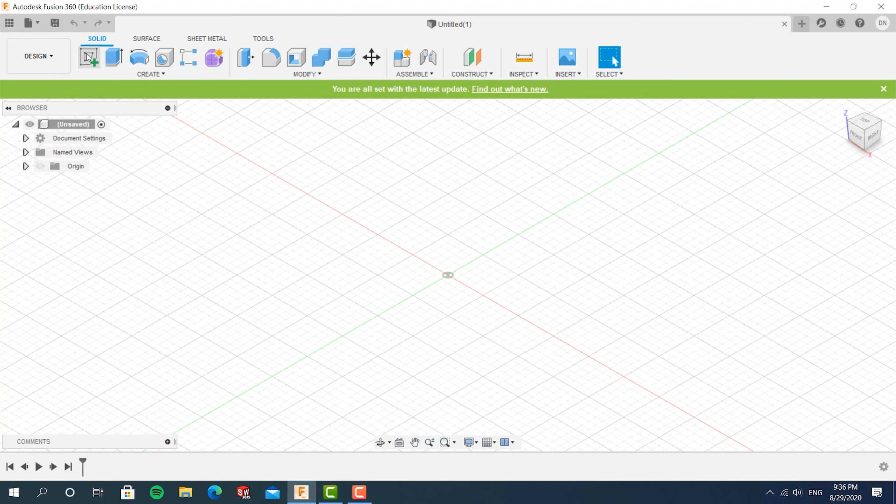Okay, so now let's get going with the tutorial part. For anything you want to CAD out, you want to first create a sketch. A sketch should be a 2D version of whatever you want to do. So let's start by creating a sketch using this tool right here, create sketch. For that, you need to choose a plane to draw your shape on. Right now, let's choose this plane right here, which is the front plane.

When you're sketching, you have three basic types of functions. First is create. Basically, you create different shapes, different things - this is the bread and butter of whatever sketching you need to do.

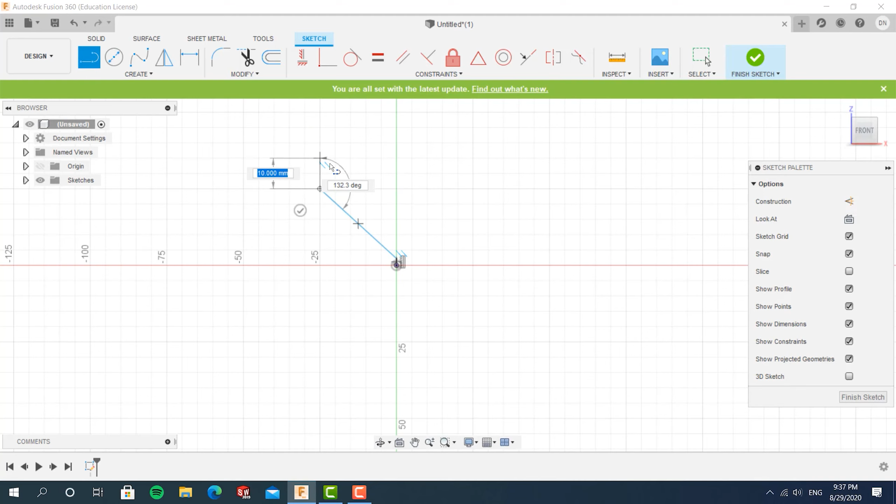You can add lines, the most basic shape. This is like its name, just a line between 2 points. The first click decides where the line starts, the second click where it ends, and when you continue on, it continues from the end point of the previous line - your next click becomes the end point of the next line. If you want to exit this function, you can double click, click a point you already have on your sketch, or press escape.

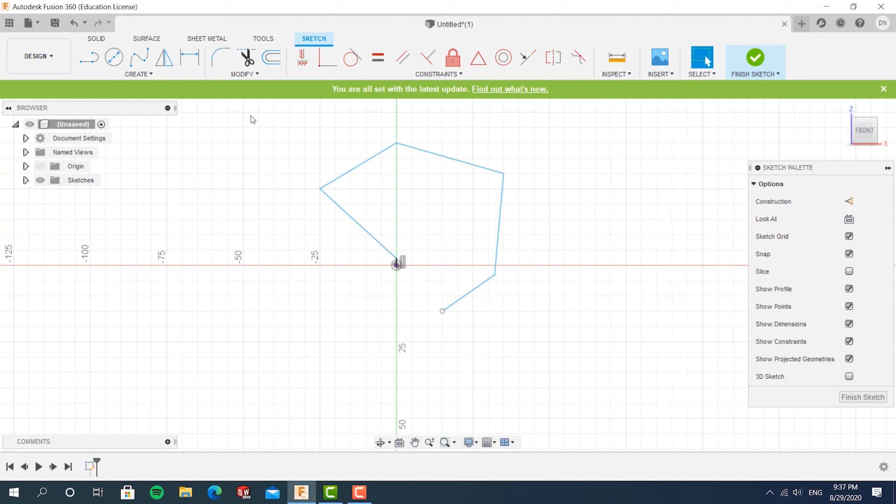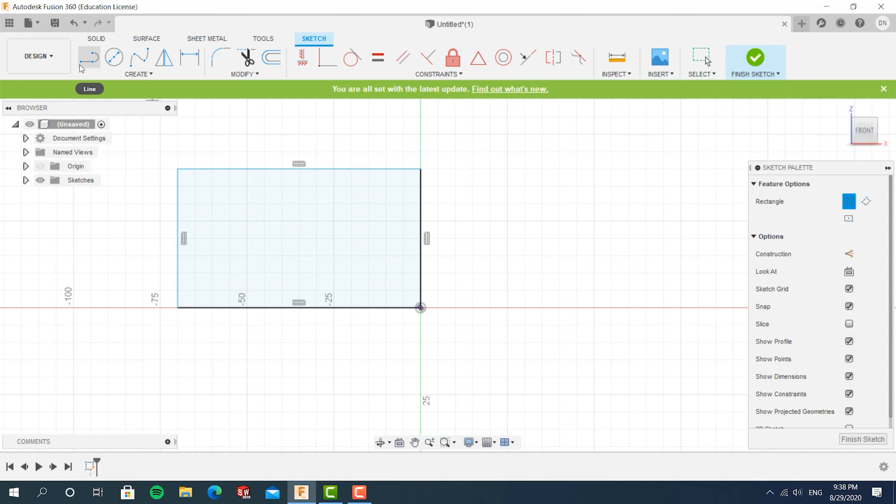Okay, so let's delete those. Other functions you have are creating rectangles - these are the different types you can use. The most simple one is the 2-point rectangle, where you create a rectangle out of 2 corners. The limitation of this one is it will mostly line up with the 2 axes. You cannot make a rectangle going this way - it's not a thing you can do with the 2-point rectangle.

If you want to do that, you would need to use a 3-point rectangle, where you choose 3 different corners. Let's delete those and move on to the next one.

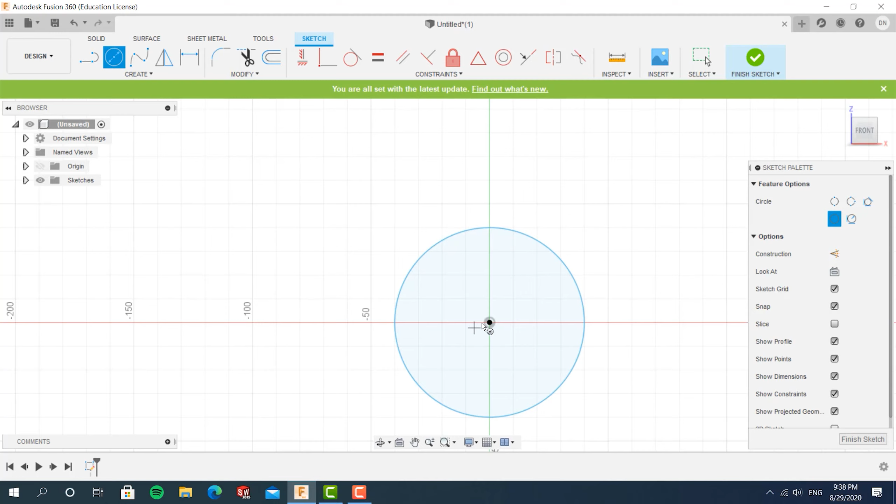The next tool is going to be a circle. The first click is the center, the next click is one of the border points - basically you just draw the radius and it creates your circle. You have other ways to draw a circle, but that's the most simple way, and most likely you'll just use that one and add constraints later to limit it or set it where you want.

You can create an arc, create a polygon, ellipse - everything is very simple and bare bones. You read the name and you basically get it. The things you most likely won't get right away are the spline and the dimension, so let's talk about those. But first, let's just delete this so we have a clear sketch.

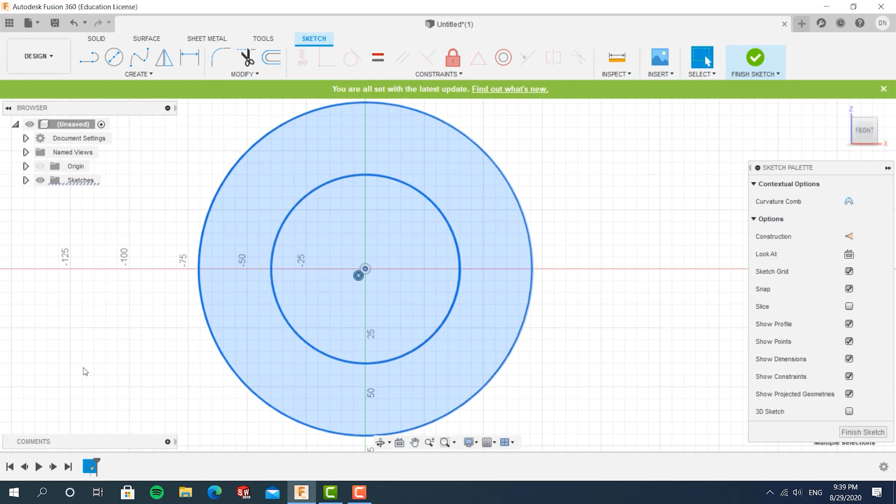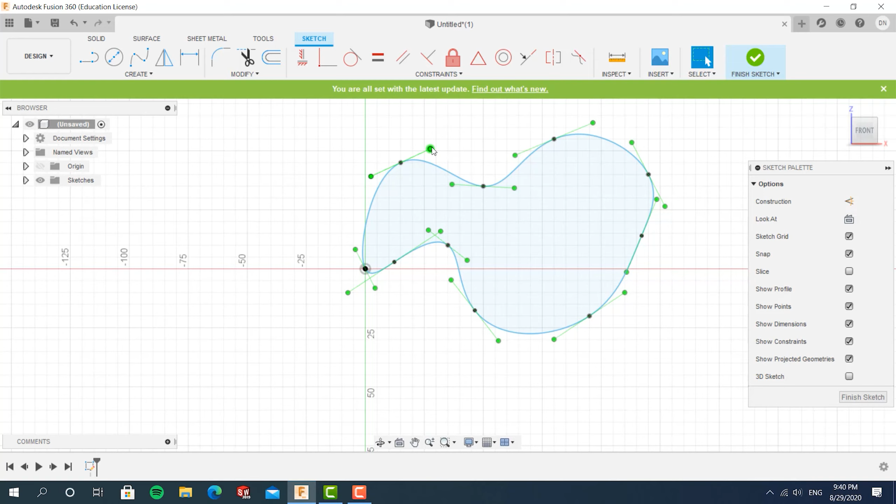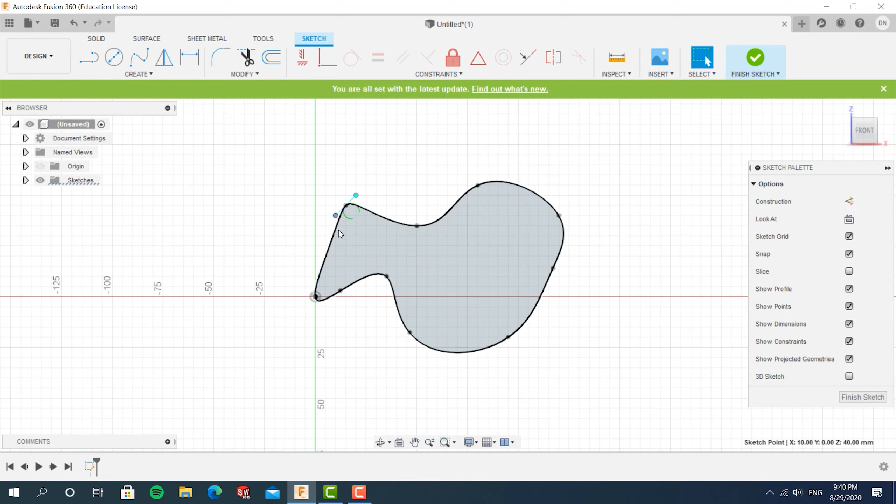A spline is basically a smooth curve that goes through all of the points that you choose. Right here, it goes through all of those black points, and when you want to modify it, you can modify these green lines and green points here called the spline handles. If it's longer, it will follow the spline handle more closely, and if it's shorter, it won't follow as much - you can modify those. This tool is very useful for making weird shapes, when you only have some constraints of the whole shape but don't really know what the shape is like.

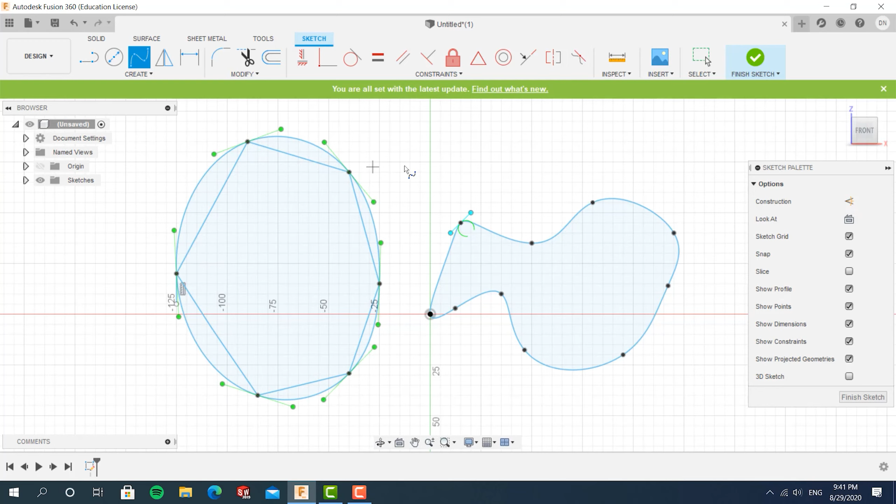For example, if I want a smooth curve that goes through some points, I'll draw out a random shape. Let's say this is a rock and I want a smooth curve that just covers the whole rock. I can just choose all of these points - I'll need to change the spline handles later on, but basically you can get a smooth curve that covers the whole thing.

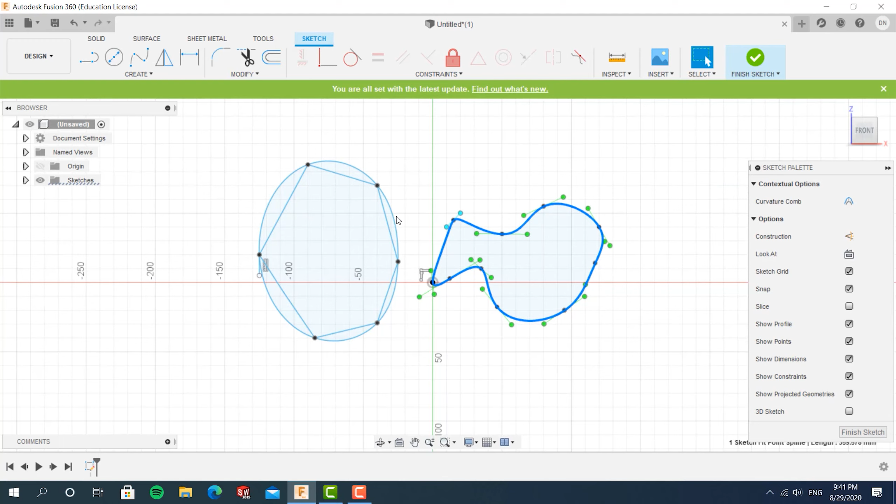It's very useful when you just have some constraints but you don't know the whole shape. Okay, so that's it for the spline. Really, for now, you don't really need to know much about the spline. It is not something that you would need to care about when you're just starting out. Let's just delete off those and get to the next thing.

The next function that you might be confused about is the dimension. Dimension is basically adding size and constraints that are related to numbers about everything that you have here. Let's add some shapes, and now let's test the dimension function.

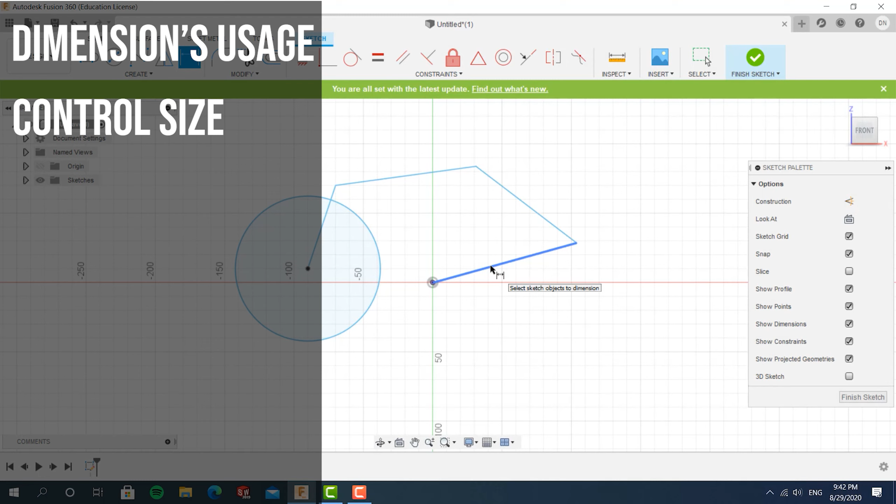The first thing that you can change by using the dimension function is the size of everything. You choose a line, you can choose the length, and you can change the length of the line. Let's say right now it's 107 millimeters. I can change it to 50. You can see that it's shortened by more than half.

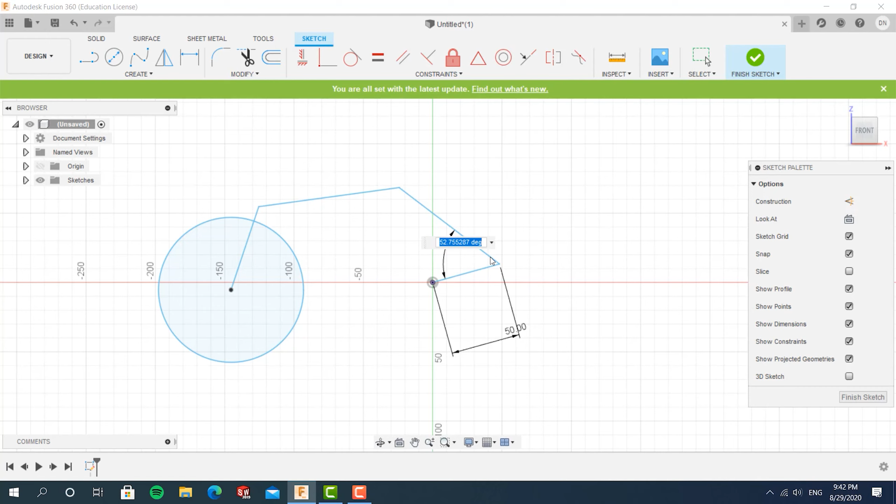You can change the angle between two lines by pressing both of them. Right now it's 52.

I can just type in 80 and it will turn into 80. You can change the length of it in a certain axis, so this is the length of it in the x-axis. I can change that to 40, for example. I can change the diameter of a circle.

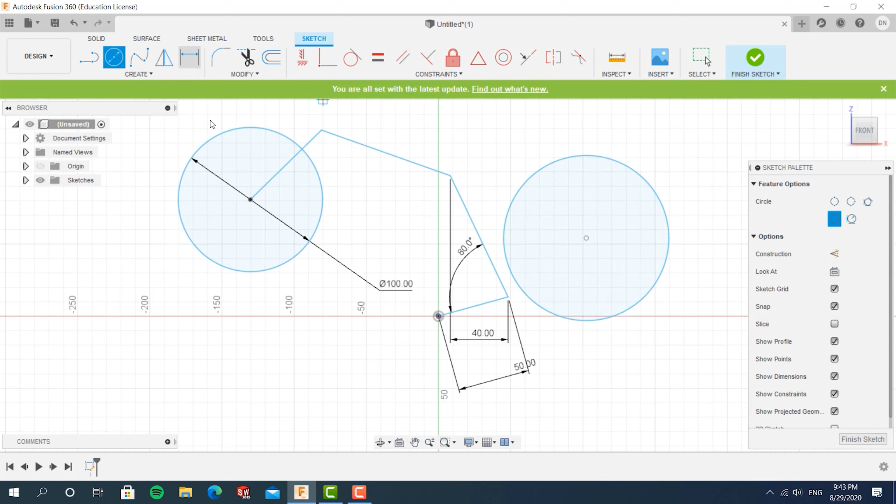Furthermore, I can change the distance between the center of circles and just generally between points. Let's put this as 200, for example.

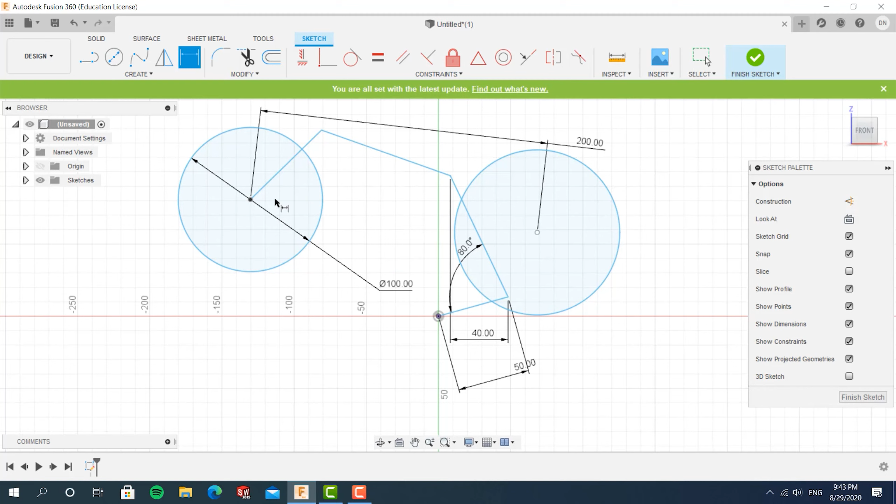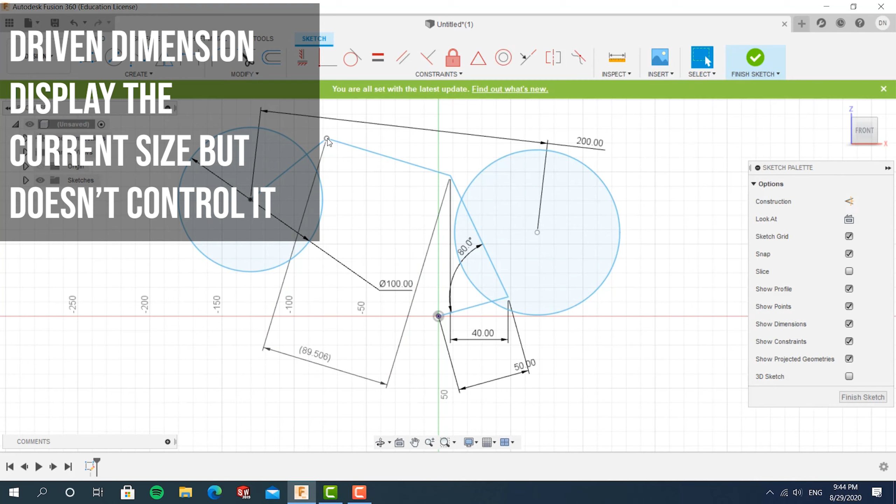Another thing I would like to note about using dimension is that there's a thing called driven dimension. For example, if I choose this thing here, instead of clicking it immediately, I change this to driven. Now this will not change the actual length of this line, but the number will change accordingly when you change the length of this line. Basically, if you have a part that you don't know the size of, you can just add a driven dimension there and change every other thing, and then whatever you're left with is the number you need.

Okay, then you can move on to the modify functions and the constraint functions. Constraint is basically adding relations to different objects that you have on your sketch. You can make two lines parallel, make their length equal, make them perpendicular to each other.

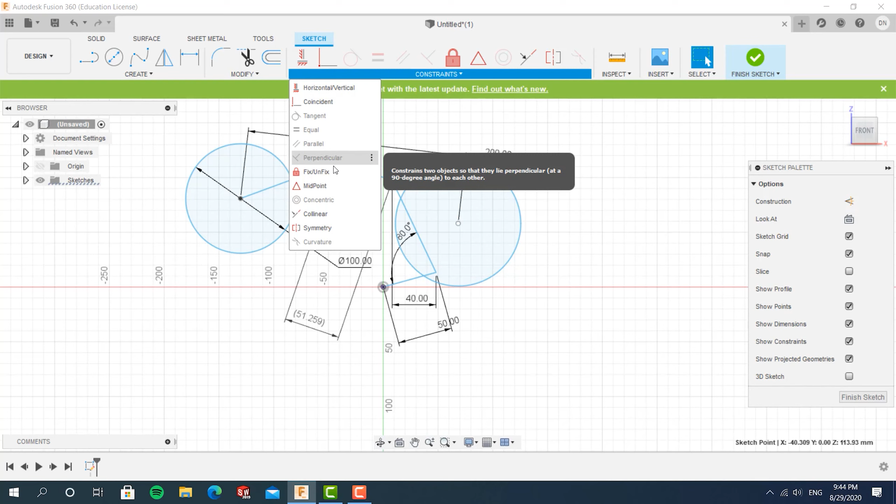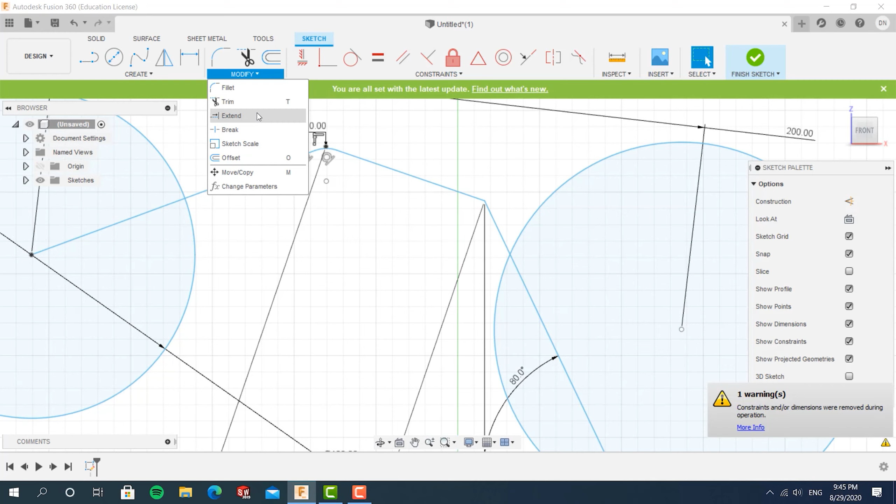Basically, these things are very easy to understand. It's just relations between different lines, different circles, lines and circles of the objects. It's very simple. Fillet is creating a round corner between your lines, and trimming, like its name, you just cut things out.

Offset is, well, you make an offset of whatever you want. Like this here, it's basically copying this whole shape, pushing it in a direction perpendicular to whatever point it's copying. The offset function basically offsets whatever you want.

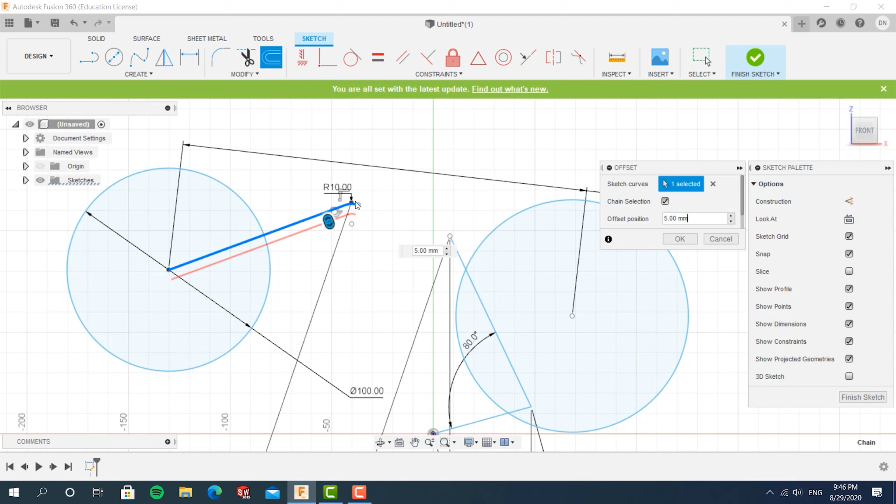As its name suggests, it pushes every single point in the thing you're trying to offset in a direction that is perpendicular to the slope at that particular point. So everything in this line over here will be pushed in a direction that's perpendicular to the line. This curve right here is going to be pushed inward toward the center. That's why this curve is very small compared to this one. That's basically the gist of offsetting.

Okay, because I know that this will not help much by just talking about the tools, we will now try and make an actual thing. In making an actual thing, I will show you functions that are there from a sketching function. Let's start that now.

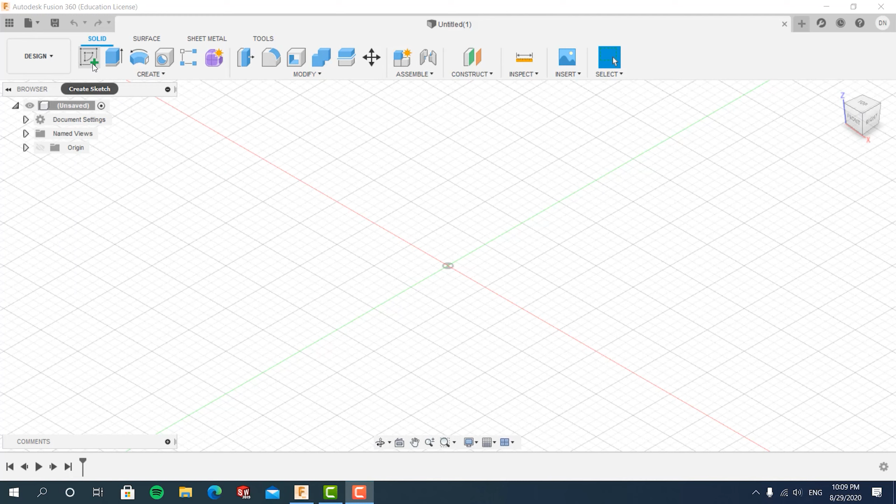Okay, so we're here in a new file to create an actual object for this tutorial. When I learned how to CAD, I was taught how to make a die. When I teach anyone to CAD, I teach them how to make a die. So that's going to be the same thing—we're going to make a die. First, like every single CAD file, you would need to start with a sketch. A sketch of a die is of course going to be a square, because the die is going to be a cube.

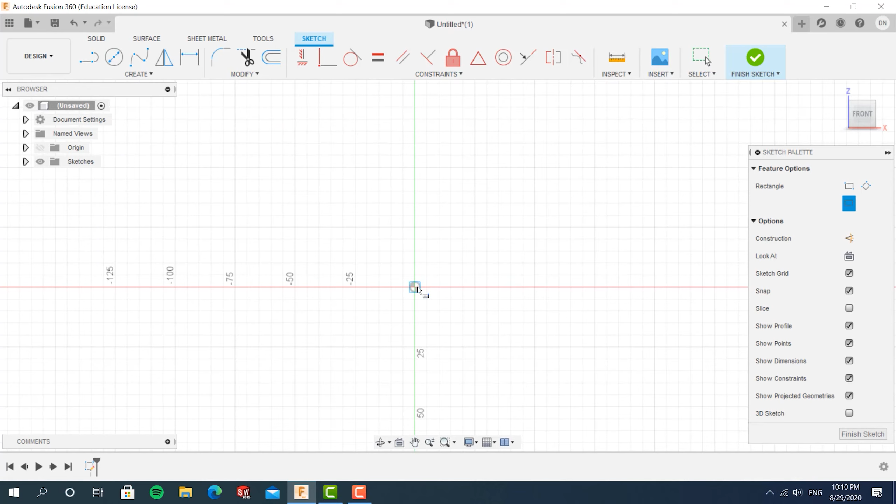So you center a rectangle, starting from the center of the whole file and stretching out. The first thing you want to do is make these two equal because you want a square, not a dumb rectangle. Then add in the dimension for the side of the die. So 50 is good enough.

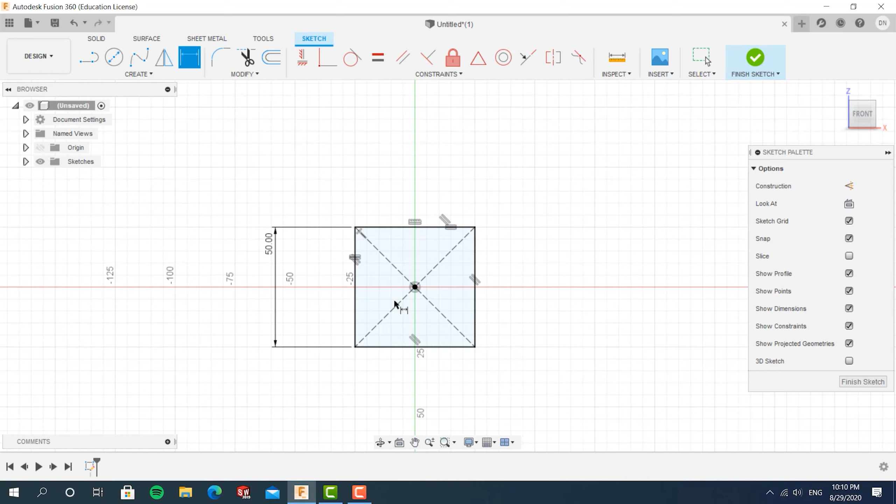After you have a 2D sketch, you have to use one of these two functions to make it into a solid. Because it's going to be a cube, you want to push it up, using the extrude function, which creates a solid object by pushing your sketch along a particular axis.

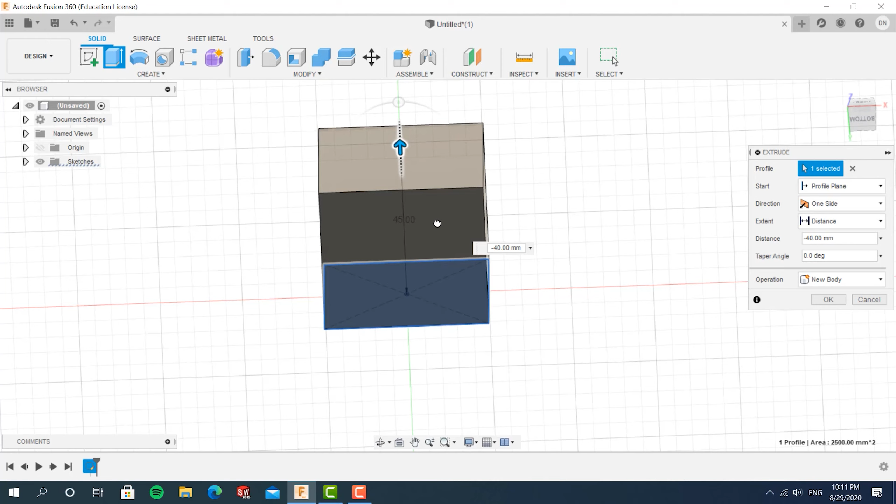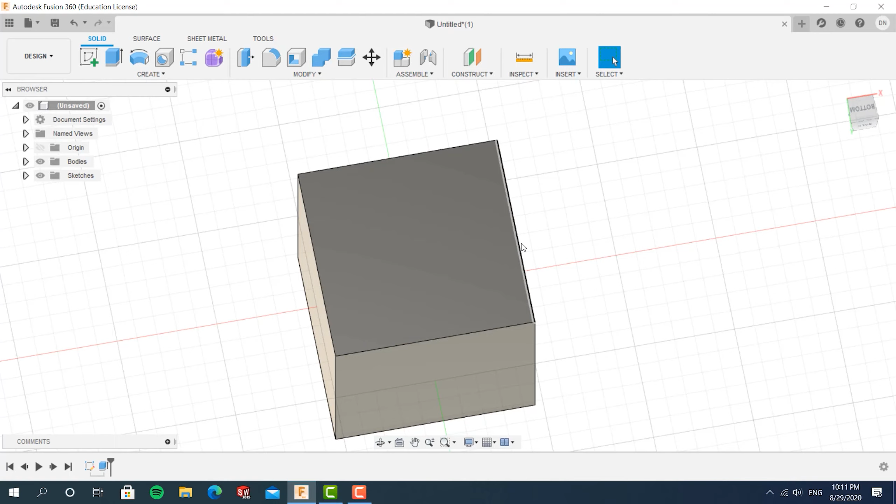Because we want the center to still be in the middle of the whole sketch, we don't want to push it only on one side. We want to push it on both sides symmetrically, so both sides should be 25, making the total length 50. Now you have this cube here.

The thing about a cube is that if you look at the whole thing, it looks a bit silly. You never see a die that's a perfect cube because that just looks silly. So one of the things you can do is use this function, which smooths all of the edges.

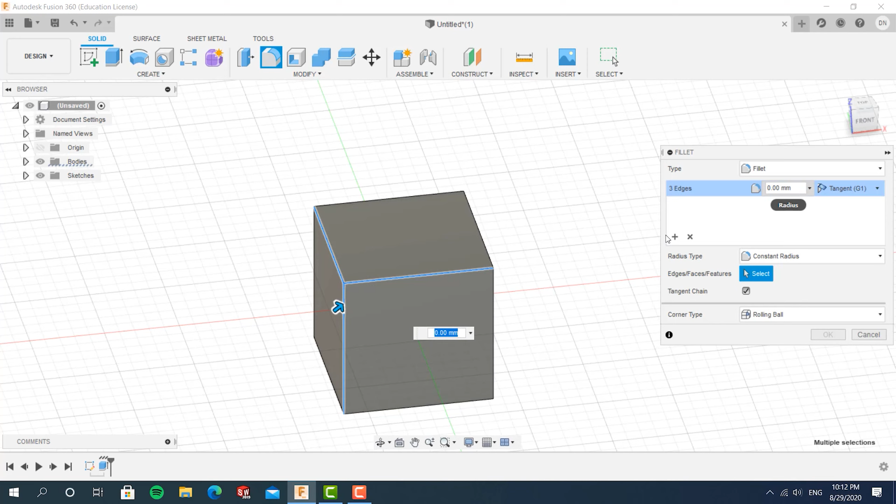Let's smooth down these three edges as an example. If I add a 5, it's going to smooth it down so that the radius of this cut is going to be 5.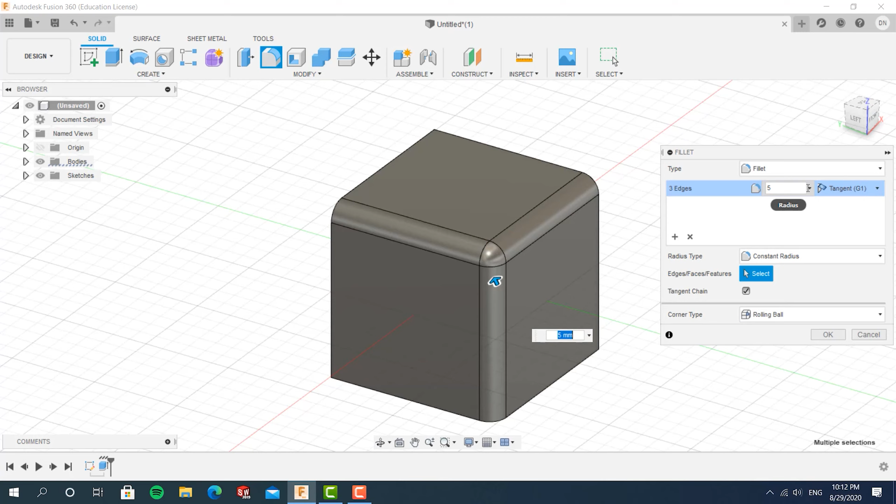We want to smooth out all of the edges, so remove the current selection and select the whole thing instead. 5 seems good. This immediately looks better, but we can still do a bit more, so let's delete the fillet function for now.

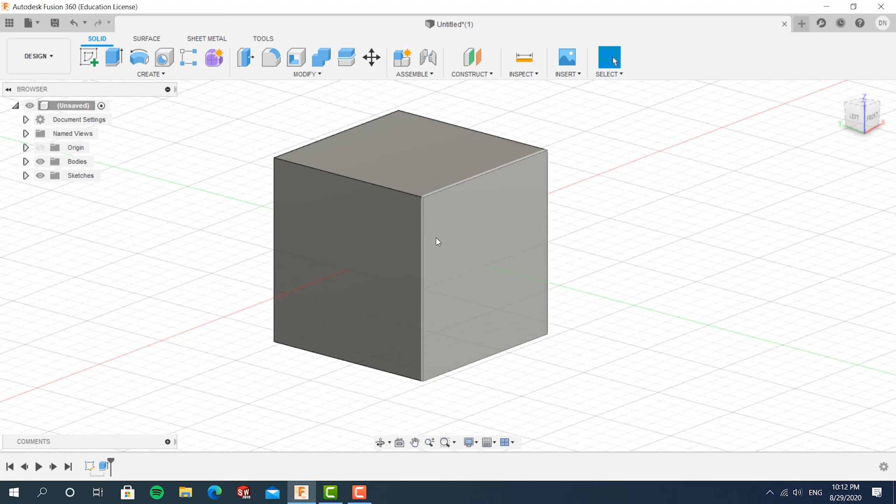This way of making a die look better is kind of a trade secret for me. First you need to draw something right in the middle, so let's choose a plane that's in the middle to draw a circle, and then take out a big area around that.

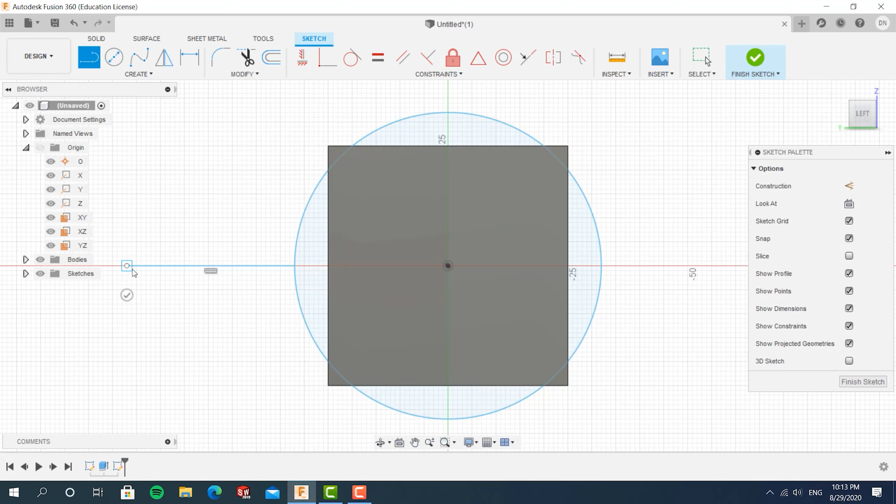The thing you want here is for the corner to be very small. Let's set this to 64. The corner still seems a bit too big, so let's add some more to it. Let's say 67 — yeah, that looks good.

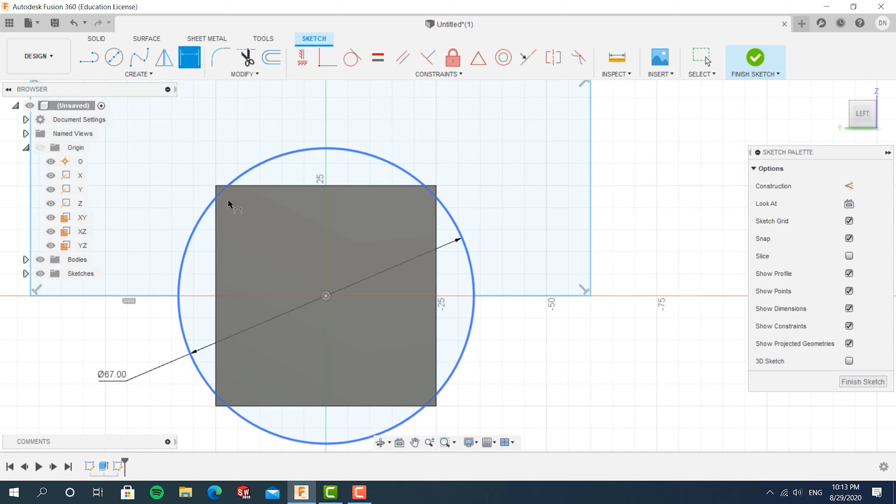You don't want to just extrude cut the whole thing out, because if you extrude cut a cylinder out here, you're left with four awkward corners. Instead, you want to use a revolve cut.

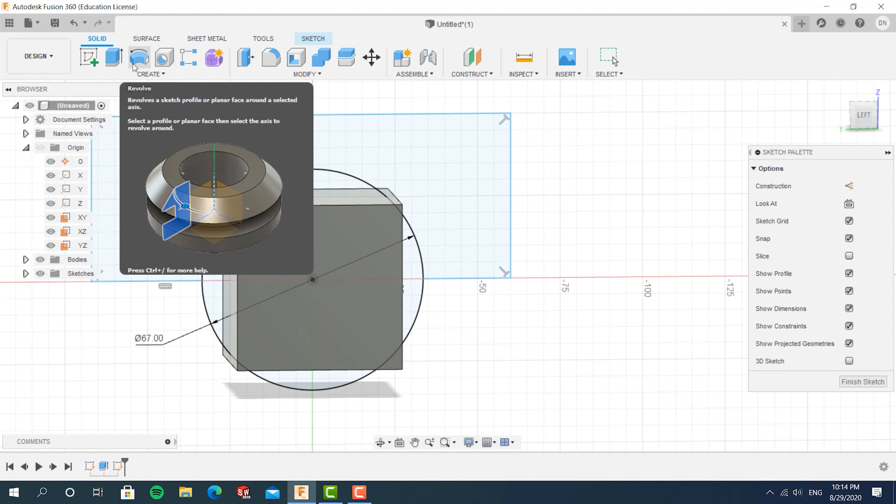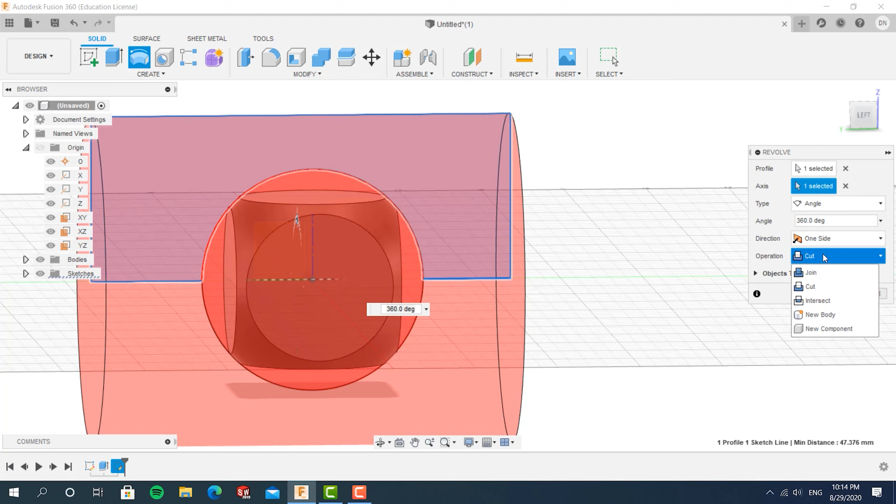This function basically spins an area around an axis, after you choose whether to add a new body or cut something out. Right now we want to choose this big area, use one of the axes, and change it to cut instead of new body.

We cut that out, and this looks pretty nice. It's kind of a mix between a cube and a sphere. It's kind of weird, but it looks good, so I guess that's why I like it.

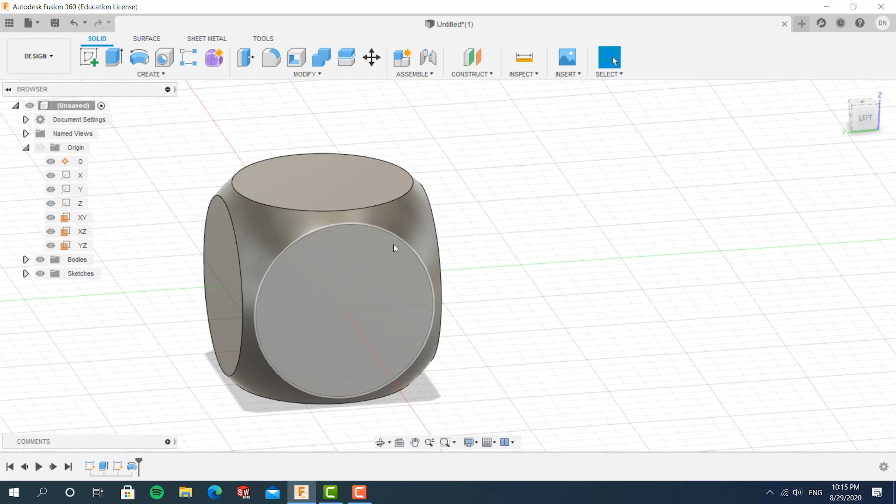For the die, you want to draw out the holes. For those of you who can't remember the orientation of the holes on a die, just remember that two opposite sides add up to 7. If this side is 6, the opposite is 1; if this is 2, the opposite is 5; if this is 3, the opposite is 4. So let's start.

We can make the hole in a myriad of ways. The first way is to draw a circle and do something similar to what we did to create the nice shape for the die — just revolve cut it around.

If you make the center of the circle straight in the middle, that would look really weird, as the hole would be way too small but way too deep. So you want to offset it up a bit.

Generally, what I've found to look pretty nice is if the distance between the center of the circle and the face is 1/3 of the diameter of the circle. So if I put this as 9, the distance from here to here should be 3.

This small area here is going to be the cross section of the thing you're going to cut out. So again, use the revolve cut function, choose this area, and choose this axis to cut out the whole thing.

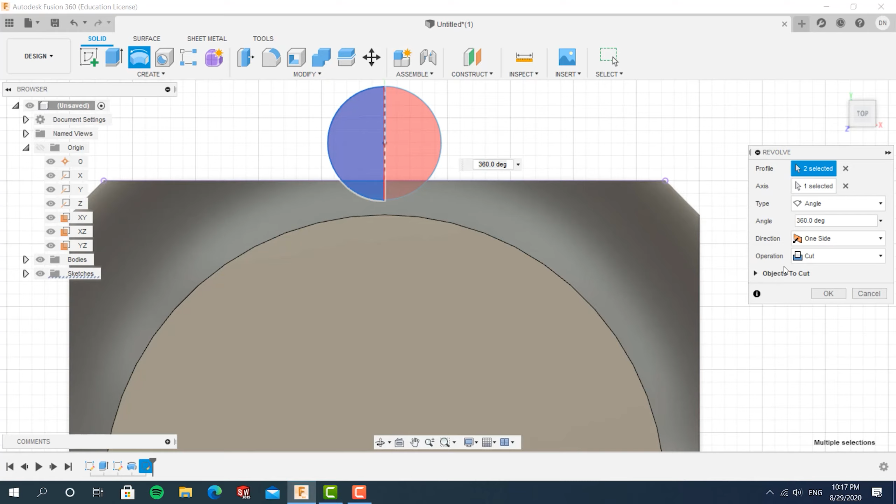Also, you cannot choose areas on both sides of the axis, because that will cause errors in the system — only choose areas on one side. Cut that out and we have this nice hole up here. Let's continue with the other ones.

So the next one I want to draw is going to be the 3 hole, because that's another simple one, because it has a hole right in the middle. So again, draw a circle, draw some lines to separate it into 2 halves, so that also serves as the axis for your revolve cut.

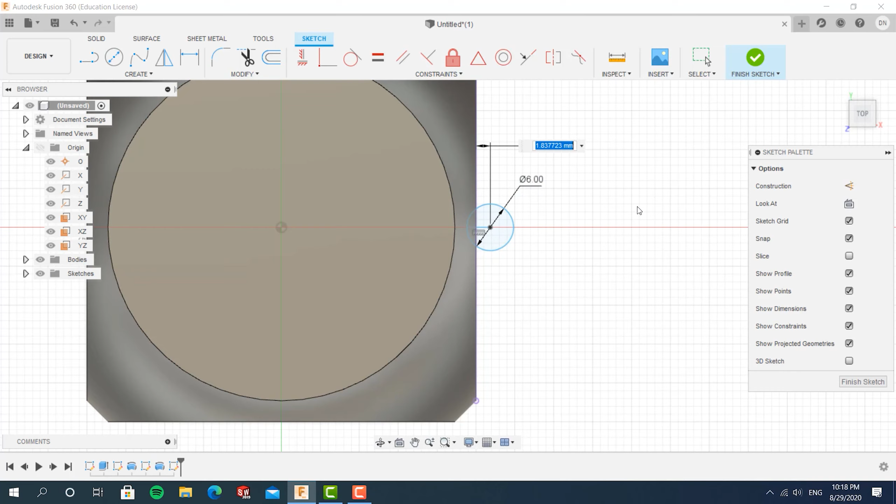If you, because this one is going to be the 3 and not the 1, it should be a bit smaller. The previous one was 9, so let's put this as 6. This is 1/3 of it, so it's going to be 2. And then we can cut it out. Revolve cut, choose this one, choose the axis, cut.

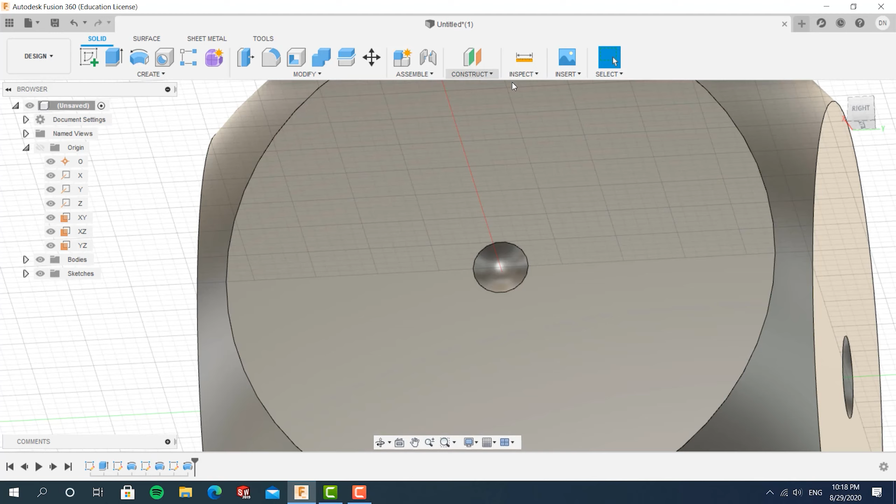Okay, we have a smaller hole over here. Now, because we don't want to draw 2 circles over here, we need to make an extra plane. We need to do a lot of stuff, and that would take a lot of time. We don't want to do that because everyone is lazy and everyone should do things as efficiently as possible.

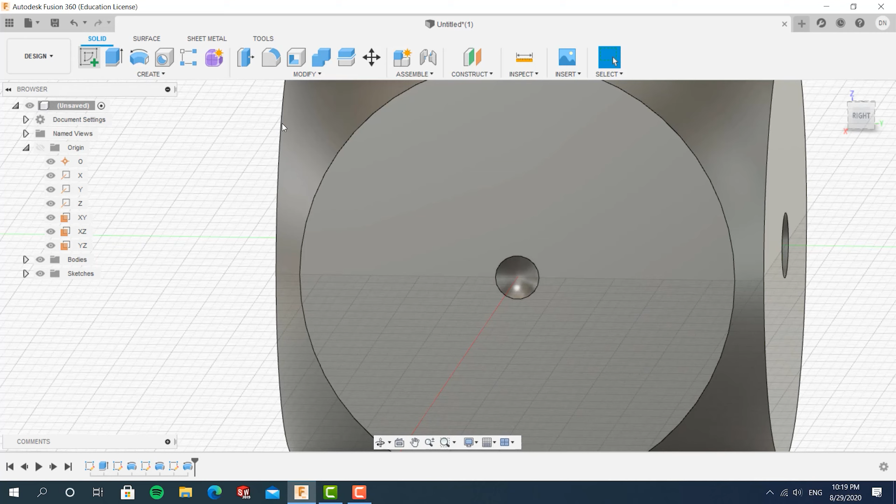We're just not going to draw new circles and cut new holes. We're going to use a pattern. Basically to use a pattern, you copy whatever body or feature is the thing we're about to do. We're going to copy the revolve cut feature right here and copy it in a particular direction. For the 3, we're going to copy it diagonally, so we need a reference for it to go diagonally. Let's draw that reference right now.

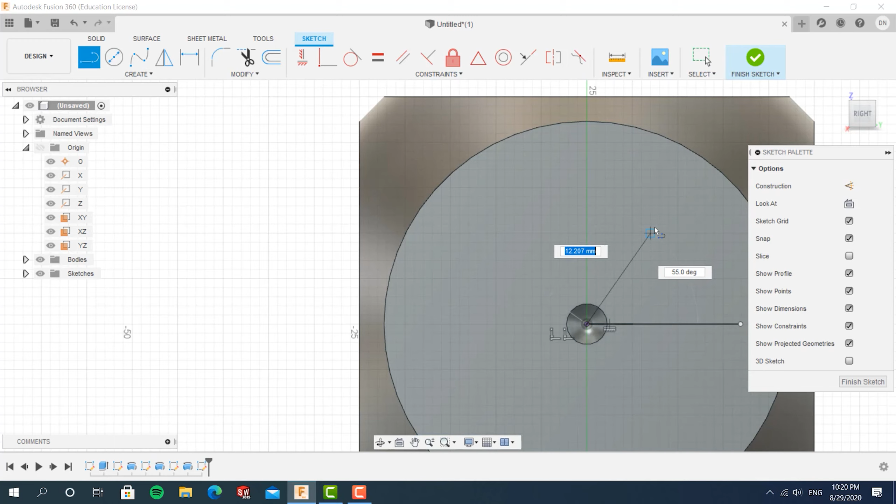So first, draw a line, and then actually we need to draw 2 lines. This is trying to act stupid, so let's make this construction. Let's just add another line, that's more simple. Okay, dimension, make the angle between these two be 55.

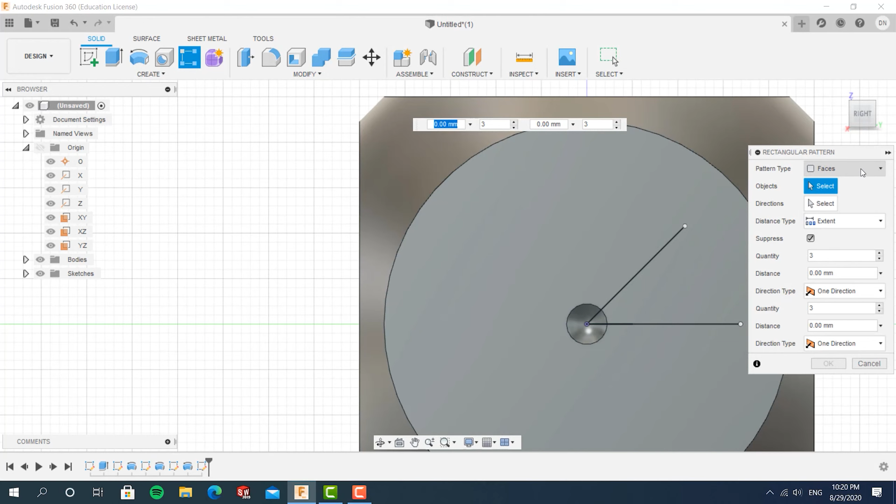So that's going to be our reference. Now finish this sketch and move on to this thing. So the pattern type is not going to be faces because the thing that we're copying is a revolved cut, which is a feature. So copy this feature. The direction that we're going to copy it along is this axis.

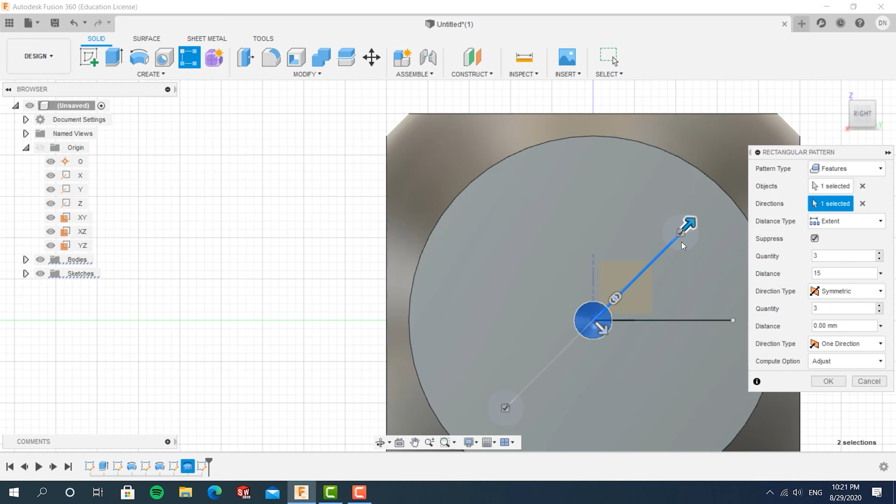Now, it's a 3, so we need to cut it on both sides. So symmetrical. Let's check. Now let's just change the numbers and see what looks nice. Okay, 15. You can see the 2 holes over here. That's good enough. If you want it to look better, you can hide your sketch.

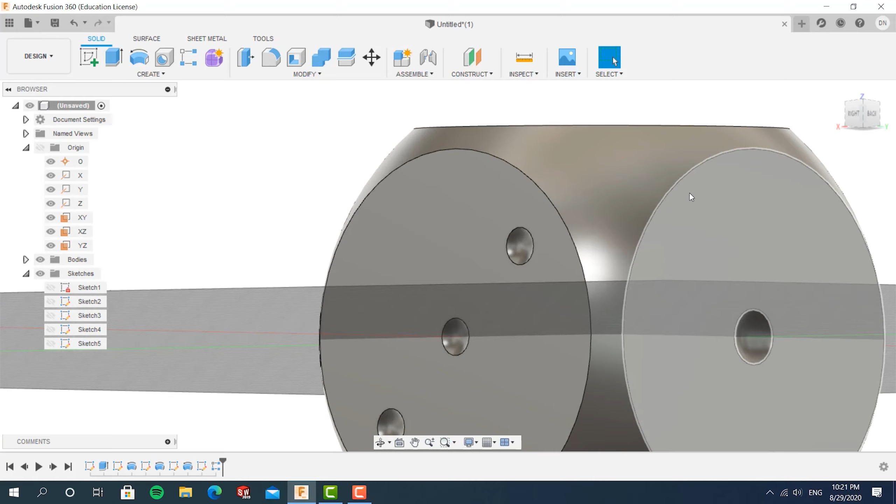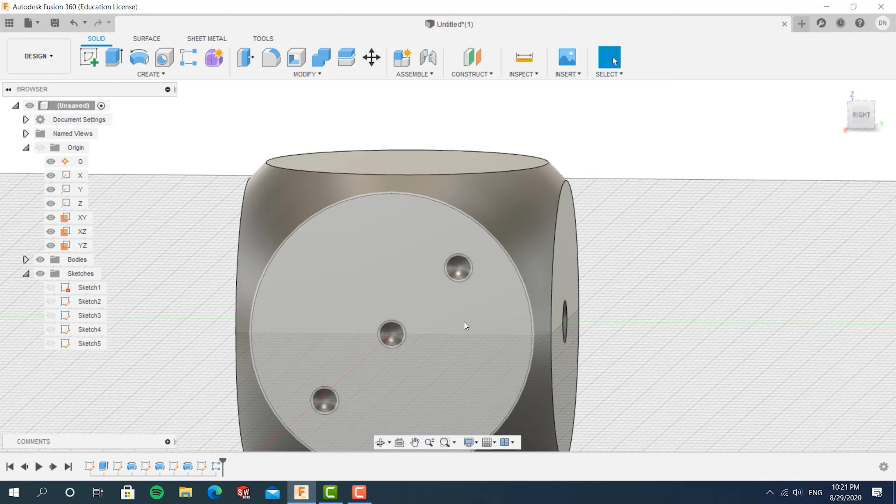Where is it? Yeah, here it is. You can hide it. So now we can move on to the 2 hole. Basically the 2 hole is just the 2 holes on the side of the 3. So we can just copy this and move it to another face. We're not going to use a rectangular pattern because that one doesn't change, that one just pushes it up somewhere, and we cannot push it that way to this way because we also need to spin it so that it's on this face instead of this one.

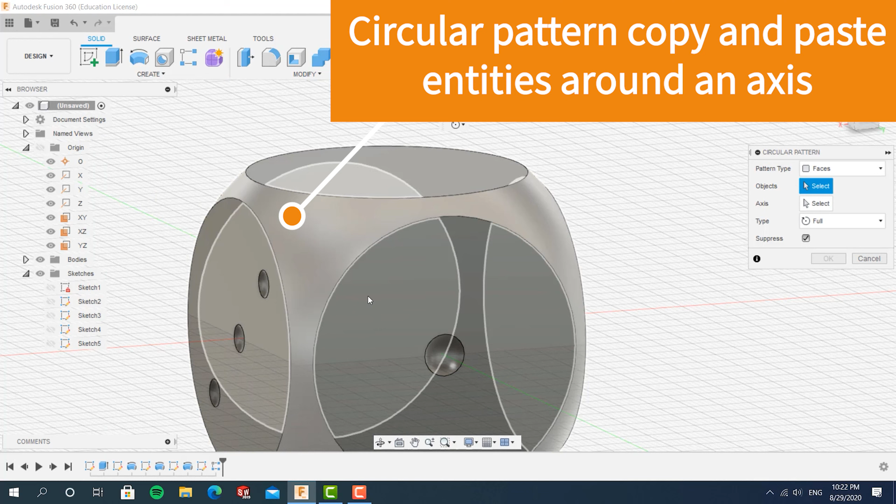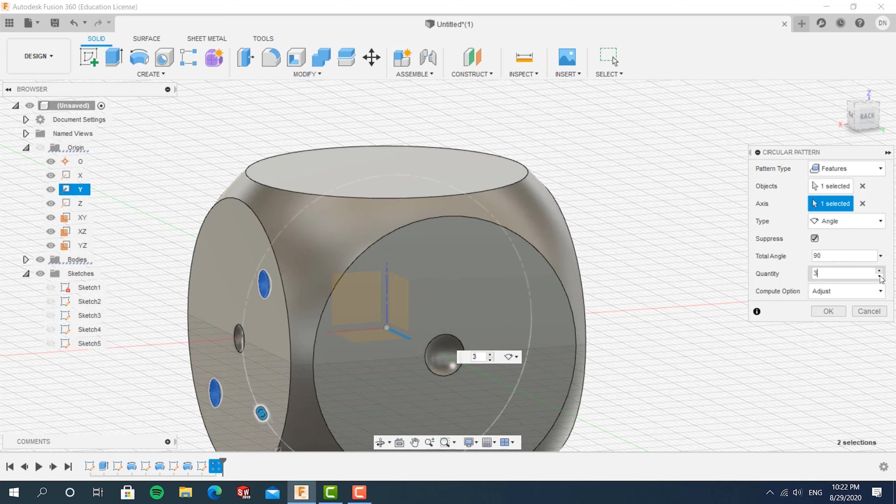So what we're going to use is the circular pattern. Again, what we're copying is a feature, particularly the rectangular pattern, and the axis that we're spinning along is the y-axis. We don't want it to go a full circle, we just want it to go 90 degrees, and we just want to copy. As you can see, we cut 2 holes over here.

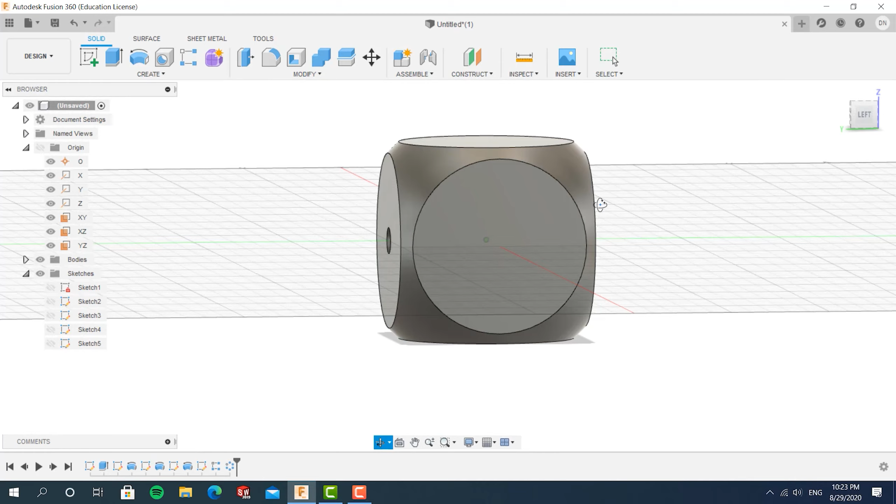If you want, you can make a separate one so that the 2 holes are closer to each other, but for this example of a die right here, I think this one is fine. So the next one we're going to make is going to be number 4, which is going to be on this side because 3 and 4 add up to 7.

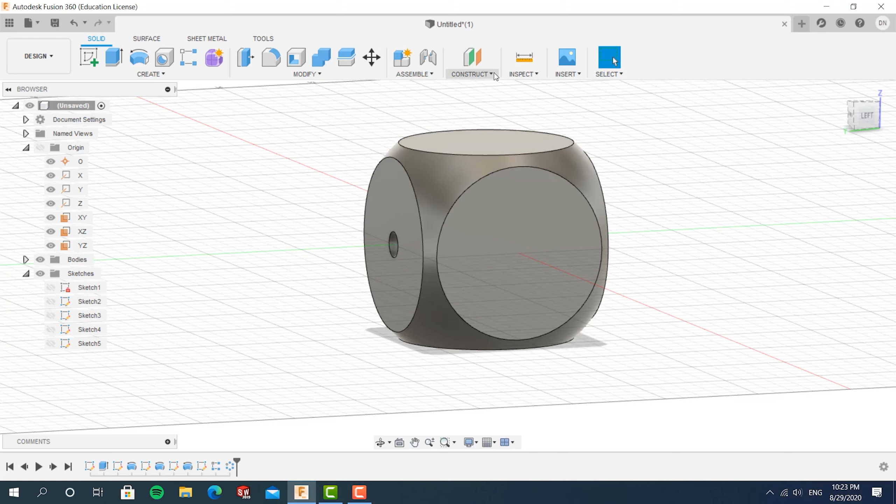So the 4 hole doesn't have any hole in the middle, so we can't do what we did for the other one. We need to make an extra plane because we want to draw it so the hole is over here. We need to draw it on a surface that is a bit up from the surface we have right here that goes straight through the middle. So what we can do is use this function, offset plane.

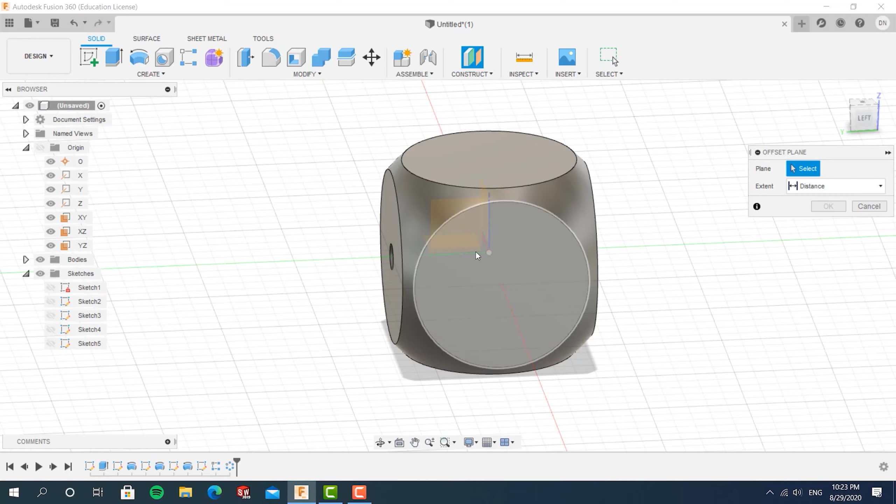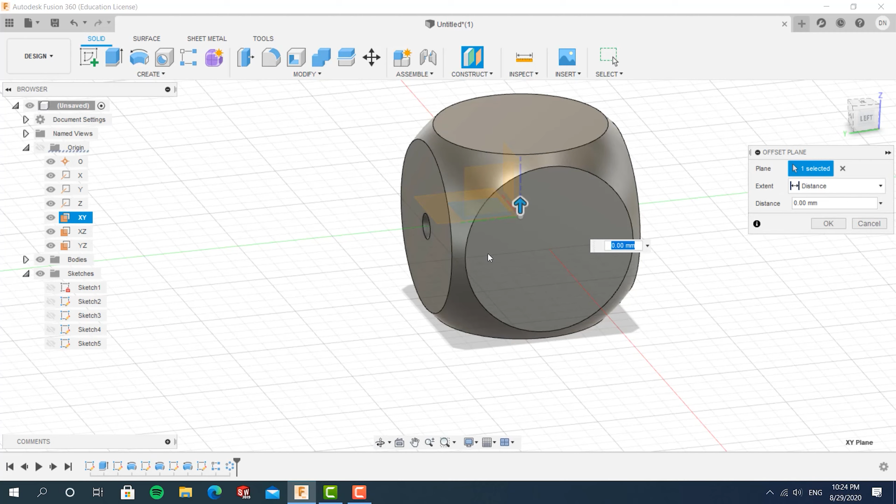It creates a plane that is a particular distance away from what you choose. So for now we want it to be a bit up from this one, so it's going to be a bit up from the x and y plane. The distance between the holes is going to be 15, so the distance from the middle is going to be 7.5.

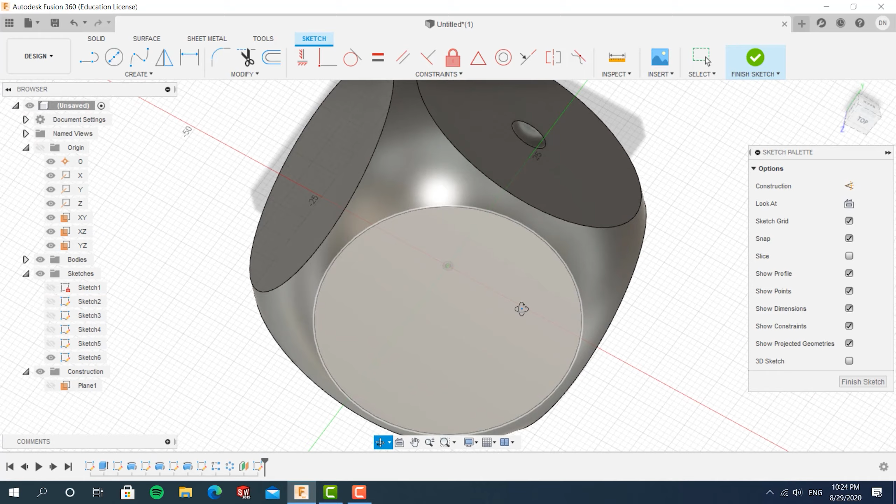So we have this surface right here. Let's choose that one and create a sketch on it. It's going to be on this side up here.

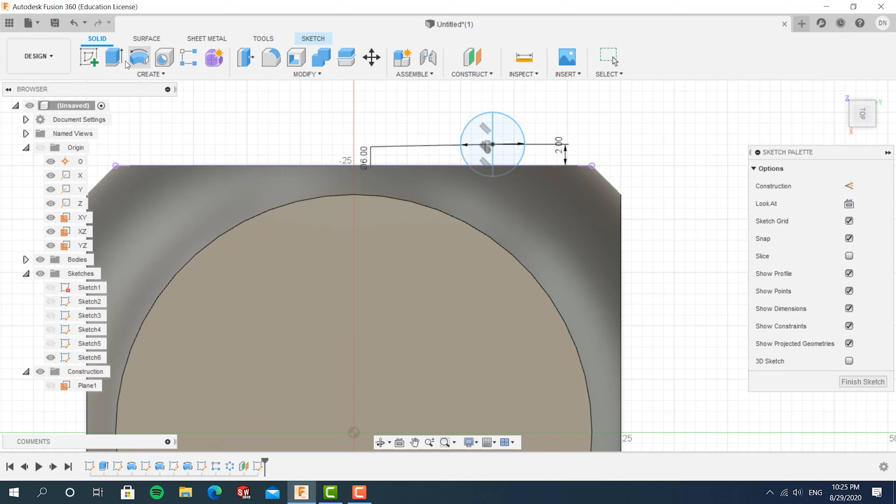Again, the procedure for creating the hole is the same thing. Add some dimension, 6. Okay, so again, revolve cut to cut out the hole that we need.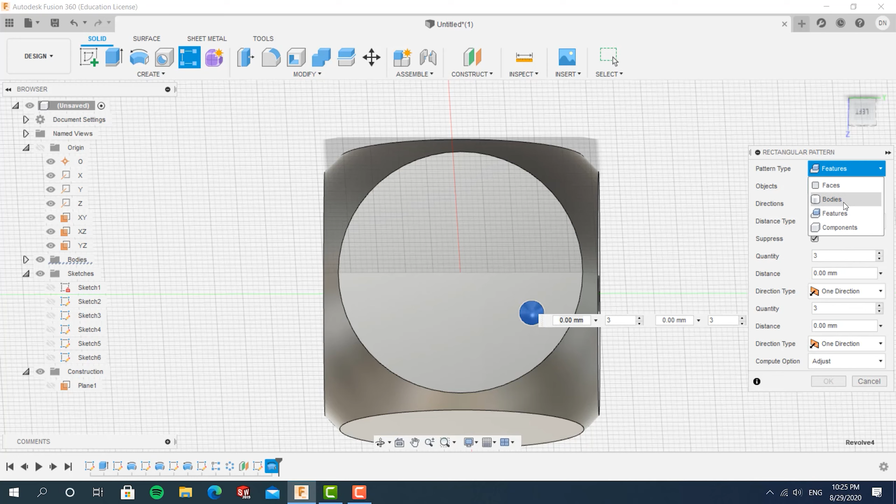Now we need to copy it, so we have 4 holes. Again, what we're going to use is the rectangular pattern. Copy the feature and not the body itself. Let's take for example, if we choose the body and click in the hole, we're just going to copy this whole big die, and we don't want that to happen.

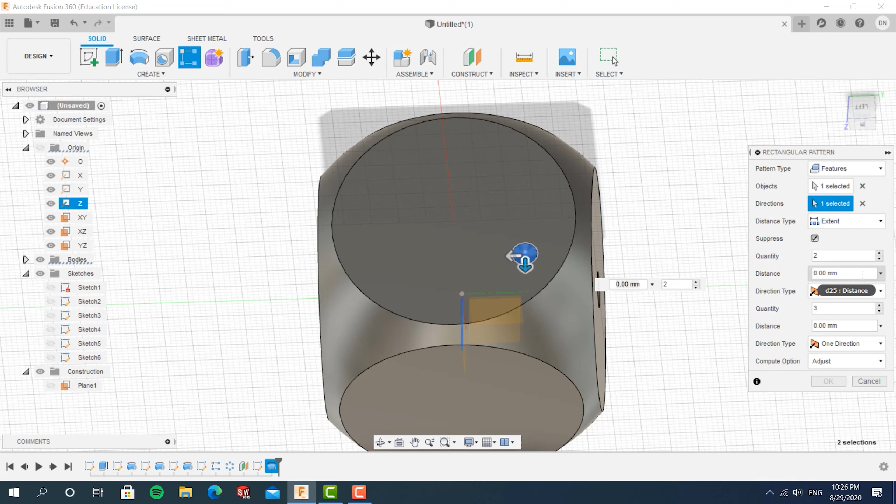So feature, direction: we want it to be along this and this axis, so Z and Y. Yeah, it's set for me already. So let's change, let's take 15.

Okay, we can see that it pushed up here, so we want it to go the other way. So let's add minus 15. This one over here should also be 15.

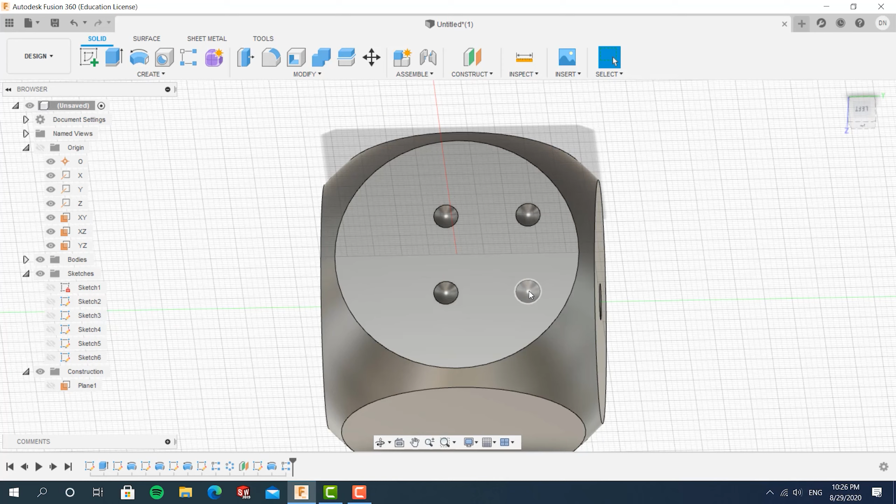Okay, we can clearly see that I messed up and did not put this in the place that it's supposed to be. Let me change that a bit. So just roll back to the sketch. You can edit it by choosing edit sketch right here.

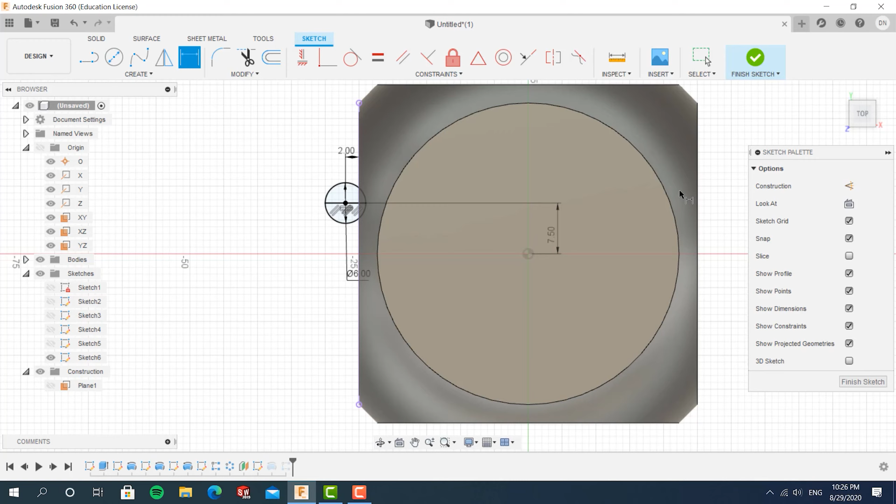We want it to be 7.5 on the center because it's half of 15. Okay, finish. Yeah, okay.

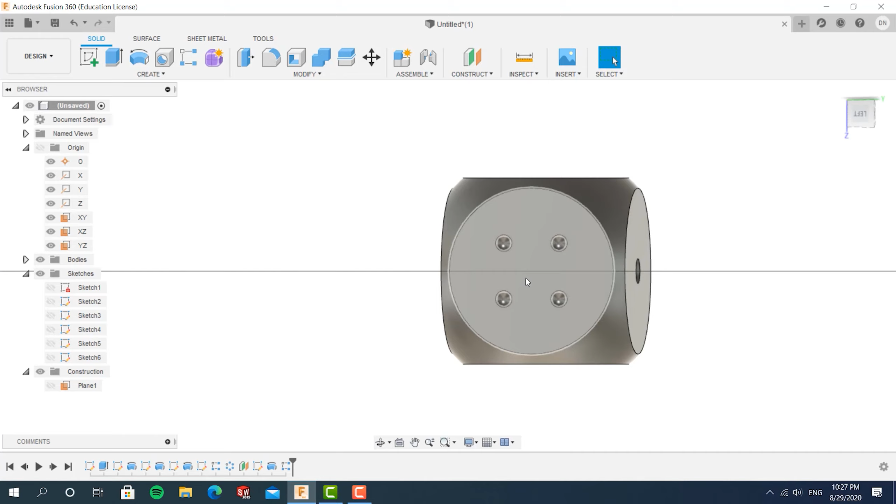If you feel like this looks a bit too close to each other and too clumped up, another thing you can choose to do is change the distance between the diagonal to be smaller or bigger, or just change up the number a bit. But for now, this would work.

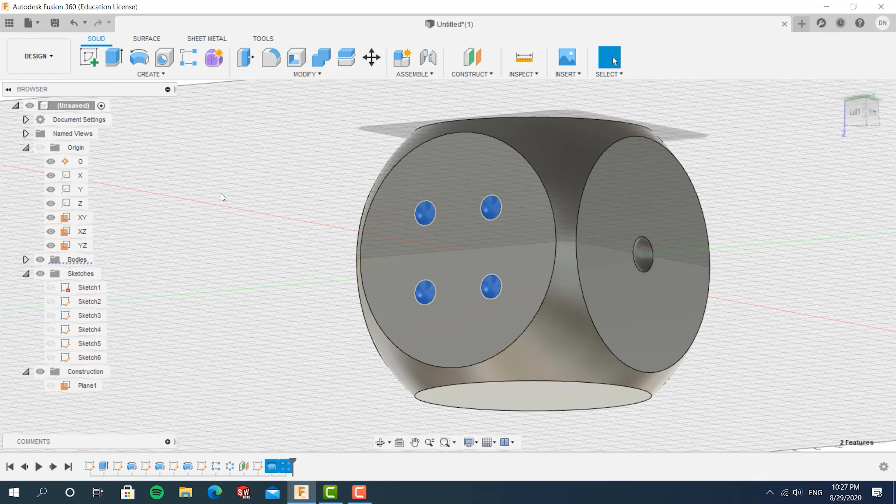So another simple one to do is going to be the 5, because the 5 is just the 4 with something in the middle. So again, like what we did with the 2 and 3, we can copy these two features and do a circular pattern to get it onto the face that is opposite of the 2.

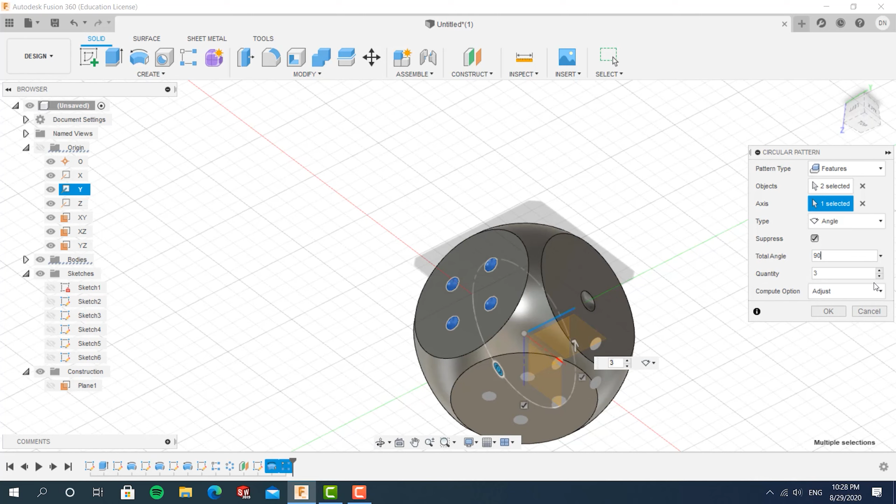Axis, you can see here and the top that we want to spin it around this axis, so that's why we just want to go 90 degrees. Just want one copy, so okay.

And yeah, we copy those over. We can probably copy the middle hole from the 3 to be over that way also. So again, we can take, so it was this feature.

Use the circular pattern and copy it up there. So it's again going to be the y-axis that we're going to spin it. Yeah, we're going to use the y-axis. Okay, so 90 is the other way around, so let's just do minus 90, one copy only.

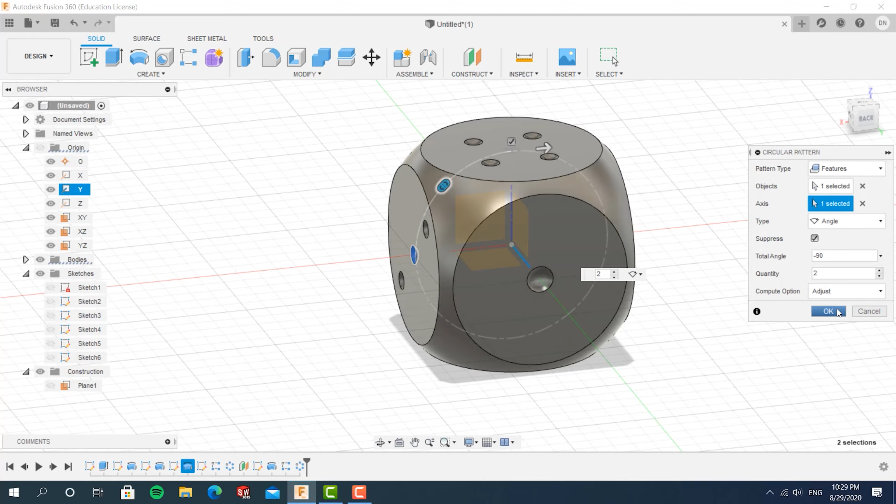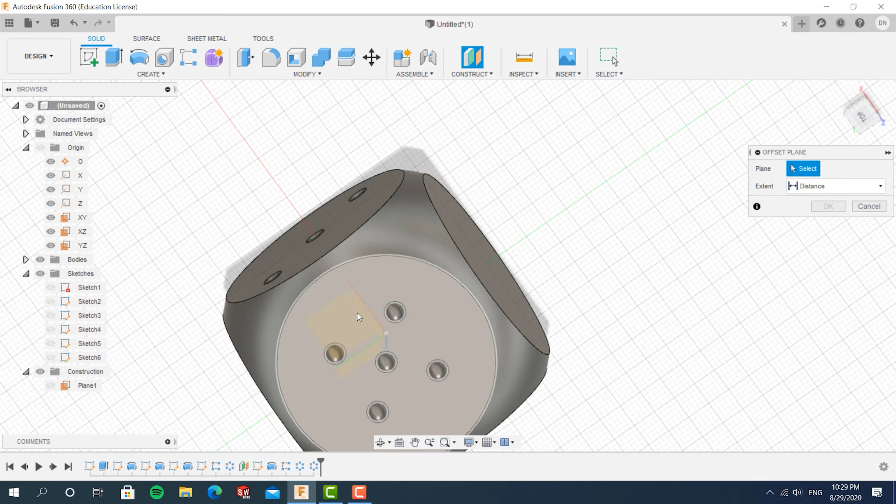Finally, we have the 6, and that is going to be basically the same thing as what we did for the 4. Offset a plane, this time just offset it with this plane here, the XY plane.

I'm just going to speed through this because you've seen plenty of times where I draw these things. So 6 and 2.

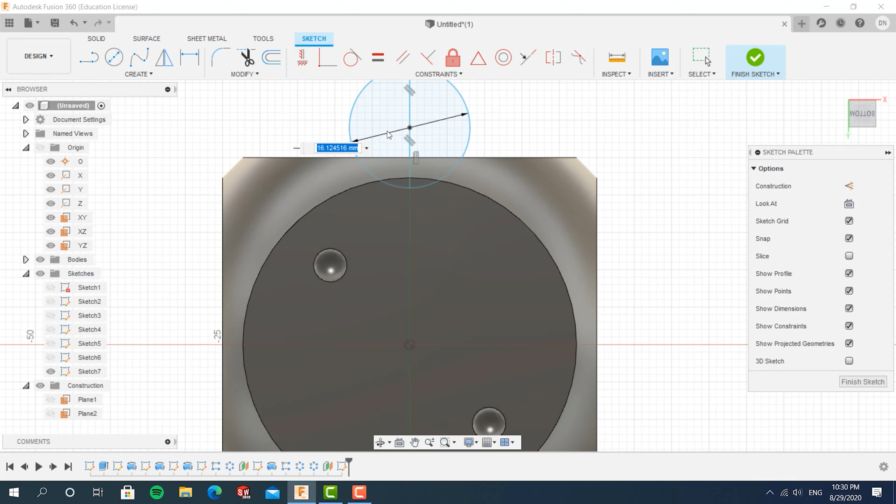So because we don't want it to just push this way, we also want it to push the other way, so let's choose symmetrical again. We want this to be 15. The other one, we just want one copy and it should be 15 also.

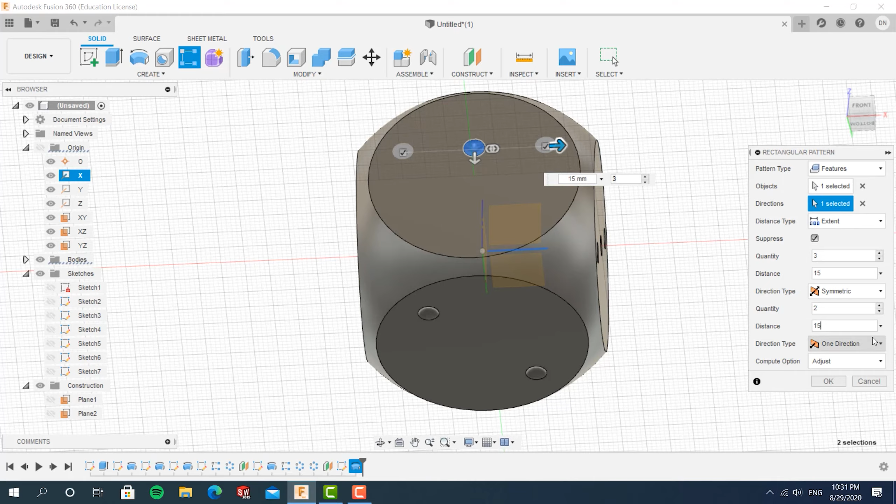Yeah, okay, those look nice. Okay, so that's it. Now we have a die.

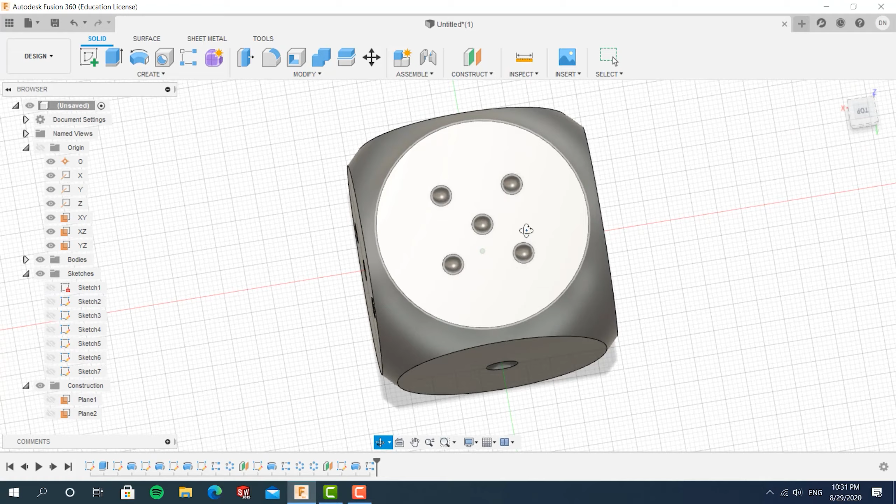That's the basic of CADing. By making this die, you learn how to use extrude, revolve, how to sketch things out, how to use pattern, and how to construct planes and other stuff. That's mostly the basic things you would need to CAD to start out with your CADing journey.